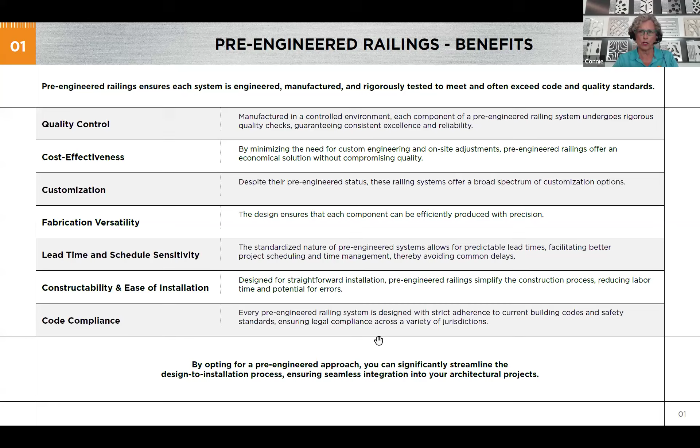And then code compliance. Of course, we're always trying to meet the safety standards and loads, with safety as the bottom line of what we're trying to incorporate with beautiful designs overall. So code requirements: there is a difference between a guardrail and a handrail. Handrail, think of it like if you lift your foot 2 times or more. So here's an example of a hand railing.

There can be some confusion. Sometimes it'll say 4 steps, 3 steps. If you're lifting your foot 2 times or more, a handrail would be required. Now, a guardrail, this is the top of the guard, a little bit different. That's meant to prevent a catastrophic event. So this is for a 30-inch drop or more where a guard would be required.

I just had a question last week about having a handrail in front of that guardrail all the way through, and that is not the case. Typically, you're going to have a cutoff at the top and the bottom of the stairs, which is on my next slide a little bit. Height of handrails are typically going to be at about 42 inches for commercial, required on both sides of the stair walking path. Opening limitations, 4-inch sphere rule.

We're all aware of that. Kids are cool. They do some crazy things. So think of a child's head passing through there, and do you go a little bit further? So I like this slide because it shows a cable rail. Today, the code does not speak to force or flex for cable rail. So with cable, you're always going to have a little bit of play involved. And we recommend 3.5, 3.25 inches, no matter who you're working with, because kids can surely do some wild things.

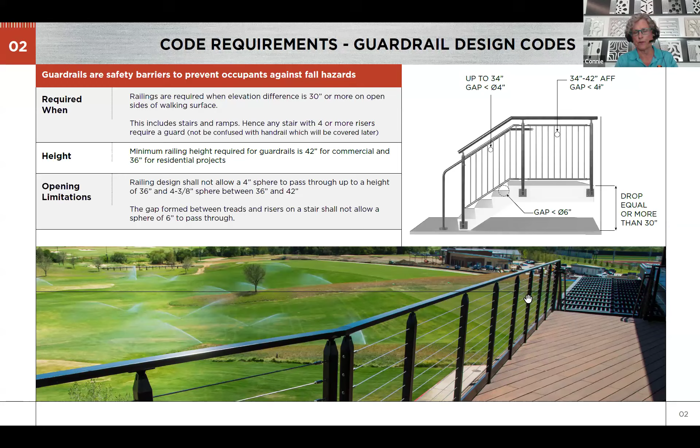Think of a work environment where tools may fall over the side on a mezzanine application. So having some sort of kick plate, doesn't have to be metal, but they indicate kick plate. So wood, just some sort of stop, so tools and safety is in mind. Prior to 2015, you had to have a handrail with a mid rail about in the middle were the words in the code. And then they changed it to OSHA rails need to be 19 inches from the top. So be mindful of that, depending upon your condition.

Handrails typically need to return to the wall, to the floor, or to itself. You'll see these 180-degree bends. 2015, again, huge code changes. So what had happened was you used to say 1 foot at the top, 1 foot at the bottom, plus a tread width. So there were these huge extensions out into the walking path of a sidewalk, for instance.

Codes are adopted by local jurisdictions. They are not written by local jurisdictions. They are adopted, and they can be more stringent or less stringent. So I will go into a little bit on how codes have evolved. Codes, back in the day, were all published in books. We had all sorts of different codes.

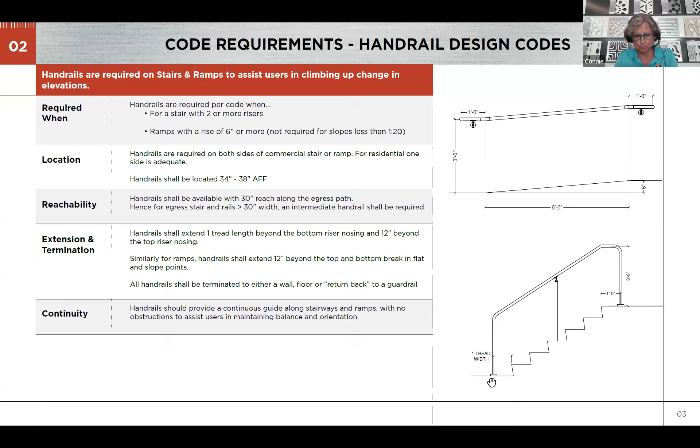So I mentioned briefly the ADA and ANSI standards, and I would talk about it now. So back in 1992, they picked up an ANSI standard which said 1.5" absolute for hand railings throughout the project. So imagine an airport with all these turns and conditions. So we reached out to the government and said, hey, you have picked up an incorrect dimension saying that hand railings for ADA have to be 1.5" absolute from the wall. That is a grab bar dimension. So think about those who are more frail.

You'll see it in restrooms where there's a grab bar, and it's meant for somebody to leverage their weight with their forearm and not have it slip in between the wall and the grab bar. So we started attending these code hearings because the government said, nope, we cannot change that. We're the government, and this is a federal law. So we started attending code hearings.

Code hearings are where anybody can suggest a code change. You get 2 minutes for your presentation, 2 minutes for the judge to answer, and then a 2-minute rebuttal. Very, very boring type of situation. But if you're passionate about a code change, anyone could submit it. It took 20 years for them to change that law, but they did it the right way. They said it's 1.5" minimum from the wall.

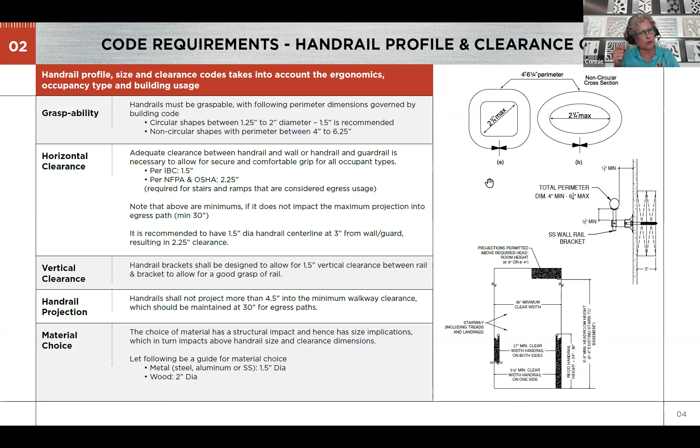And then with the material choice, typically, you're going to go with some sort of metal for your handrail, and it could be wood. So 1.5 inch standard, 1.5 inch OD for tubing sizes. But in wood, in order to meet that weight load requirement, it needs to be the 2-inch larger profile. And typically, posts are not made out of wood. There are many designs out there where you might see it looks like wood, but there's some sort of steel reinforcement in order to meet that weight load requirement.

2015, huge for hand railing changes. Prior to 2015, you had to have 3 lights of glass and a top cap. There's many benefits to still keeping that top cap in your design. And this would be an example of a top cap. With a glass railing, 2015, all glass needs to be laminated. Polyvinyl butyral for interior. SGP, SentryGlas Plus, a naming convention, which SentryGlas sold the royalties. Very rigid ionic interlayer for exterior on the SGP.

But once that wording went in 2015, that lamination actually took away the requirement for having that top cap, but we're always going to recommend it in the hand railing world. There's reasons to. If it's an exterior application, moisture can gather where the lamination is, and then you may see clouding at the bottom of the glass. The other reason is glass comes with flaws. Nickel sulfide inclusions. And if a ring or a watch or some sort of piece of metal would hit that glass panel at that top edge, you may see something burst. That said,

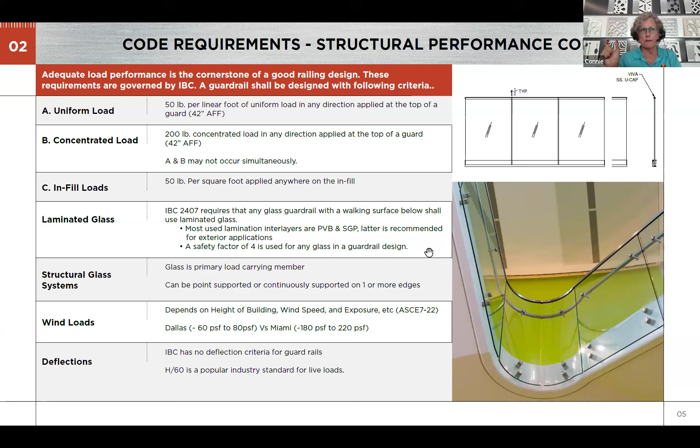And that would be the materials used for hand railing, PVB on an interior application. And then that ionic rigid interlayer, depending upon how thick you make your glass, it will meet the Miami-Dade wind load requirements, the ICC wind load certification requirements. So that SGP is amazing on how it can hold up over time.

Designing and specifying railings. So know that if you call a handrail, and maybe it's over in here more for traffic flow in an open condition, if you call it a handrail, you're going to have to meet that handrail requirement. I had a library at a K-3 school, and they had all the little kids when I walked in sitting on the floor. Not everybody was 3, or they were very short. There were 2-year-olds running around, and they were trying to corral them within this area. So this was something that they call traffic control, not as stringent, but you definitely want to make sure to keep people safe.

Thinking about maintenance and value over time. So that condition with the wind load requirements, that's something where, gee, if they would have went a little bit more in price, you would have had a better structural option on there. So understanding the full scope and maybe doing a design call with your railing supplier would be something to think about way, way early. And then how to call that out in the spec.

So if you notice on this particular photograph, the hardware is powder coated. So it really hides a lot. There's a slide later on that I love where you don't even see the posts. You see it's a flat bar right here. It really hides a lot when you powder coat all the hardware and posts involved. However, we're going to always recommend that this handrail remains stainless steel. Better value over time.

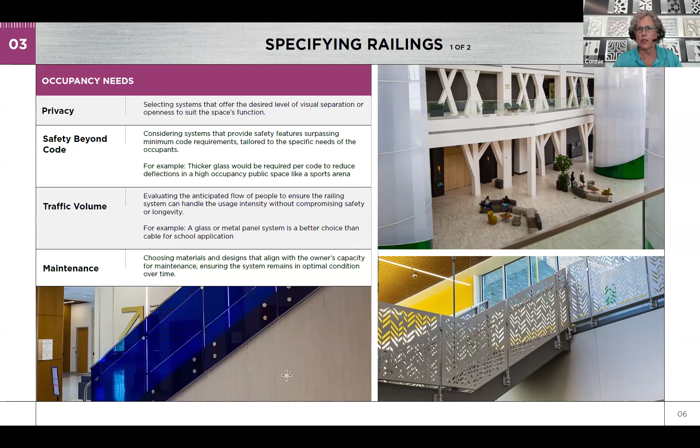And the reason would be high traffic areas. I became hyper aware during COVID. Powder coating gets sticky, it chips, rips, gets dirty. You have to touch it up and paint it and clean it. Where stainless steel is amazing because the natural oil of your hands running over it, it can hide scratches. It can change the finish on there and make it more durable over time. So with a little bit more investment up front for a stainless system, you're going to get better value, less maintenance, things like that. So again, that's immediate cost.

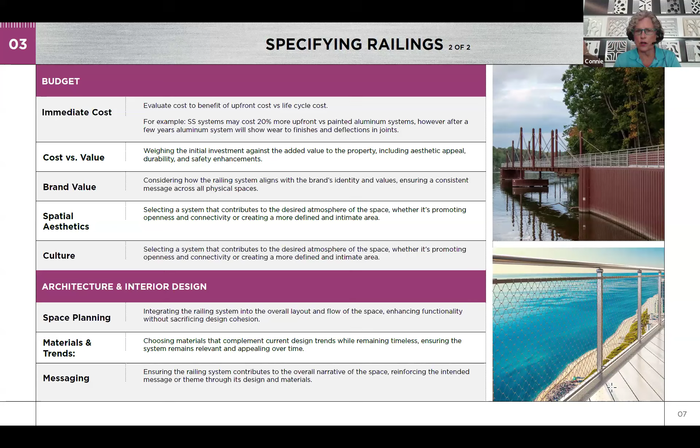We had a condition where the HVAC system was not strong enough to handle the chemicals in the building. So understanding how they all work together, stainless steel stains less. It is not rust proof. So I know that when there's an embedded type of post, sometimes you'll see rust there. If they would just curve that a little bit to make the water run off versus settling within that opening, how critical and important that is, would be great to prevent any sort of rust happening.

Specifying your railings. Are you thinking about, gee, I want the hardware powder coated? On the post side of it, I want the wood on top of it, and understanding what all that means. Here we have a little fancy two-tone effect going on, actually three tones, but what you can play around with for your design.

Understanding constructability. If we're attaching to an exterior surface, are you thinking about how that's going to drain? Would there be options for coordination, especially for a rooftop waterproofing? What can everyone do to talk way early, again, way early in the buyout process in order to coordinate that waterproofing so you're not going to jeopardize your warranty?

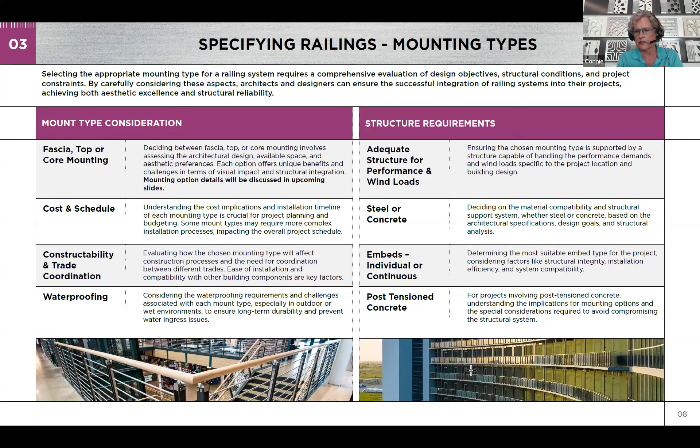Understanding your most structural mounting option. Is it going to be steel? Is it going to be concrete? I'll get into that a little bit further down when I have some mounting details up in front of us. Oh, there they are.

So typically we're going to be looking for about 4 to 5 inches of concrete, 4,000 PSI. And this could be specific to any railing system. You want to understand that. And if it is going to be mounted on an edge, we're going to look for some sort of steel. Steel is definitely structural and will hold up.

Here you notice it's a 3.5-inch minimum setback in that concrete because you have the weight of the aluminum shoe. That aluminum weighs 10 pounds per foot on that extrusion. You also have the weight of the glass, the weight of the cladding if you're going to cover it in some sort of stainless or whatever you're going to clad it in, the weight of the top cap. So that is a lot of weight to hit the edge of that concrete. It'll break, it'll fail.

Folks ask, what's a mounting surface you need for an aluminum glass system? Typically, we're looking for about 2.5, 3 inches. At 2.5 inches, you'd have a 1/4 inch on each side that may extend over. You may notice it, but people who aren't in the architectural handrailing world wouldn't really notice that. So again, that's a discussion you want to have. What can I do to save money and make things more cost effective and think about those mounting conditions?

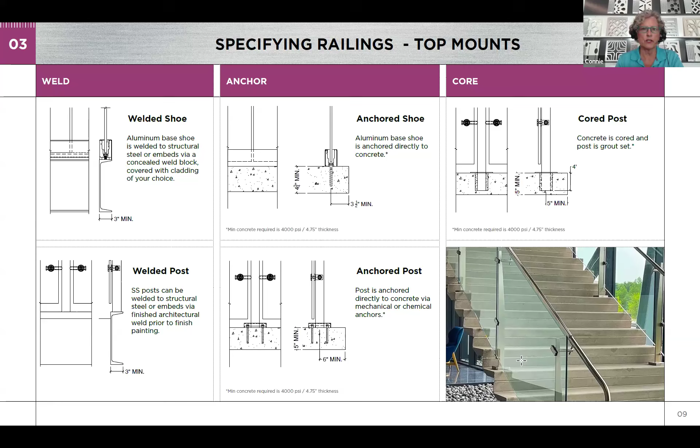So with a glass system, shoe is definitely the most popular. You can hide that mounting condition below the floor surface so it looks like the glass is coming out of the floor. But a post system may be less expensive, and another option for a VE condition. So VE is not something to be afraid of when you're working with a glass railing. Anchored shoe. So we're typically going to look for some sort of metal. That is going to be your most structural.

Fascia mount conditions apply. Sometimes when something's off and you don't have that inside to inside clearance of 30 inches, this is a fascia mount application where there's a sacrificial plate welded to this channel, and then a beautiful plate is mechanically attached. That sacrificial plate can vary in thickness, 1/2 inch, 1 inch, to make you meet the requirements of that handrail distance.

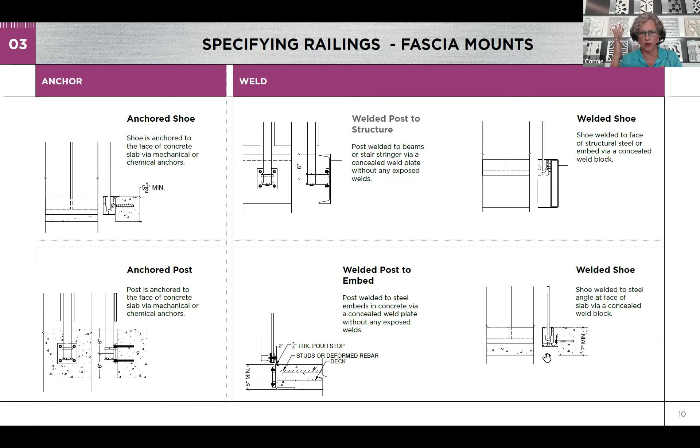So when I spoke of the penthouse with the railing going 3 inches in either direction, this was the culprit. Bigger is better. They had steel angle mounted on a curb. We would have gone bigger on the curb, and we would have gone bigger with the angle. It was 1/4 inch angle, which created a bounce effect. So go bigger on your angle, 3/8 inch, 1/2 inch, something to be mindful of for safety.

Plans and specs. Of course, copy and paste is your friend and your enemy. You want to make sure your words are clear, concise, black and white instructions. So if you go to specifying the Word document, take away as many words as possible. RFIs come through probably every day. Sometimes it seems like hand railings are catching up to the rest of the building. I see that frequently, but those early discussions of understanding what your design intent is and how we can meet that overall.

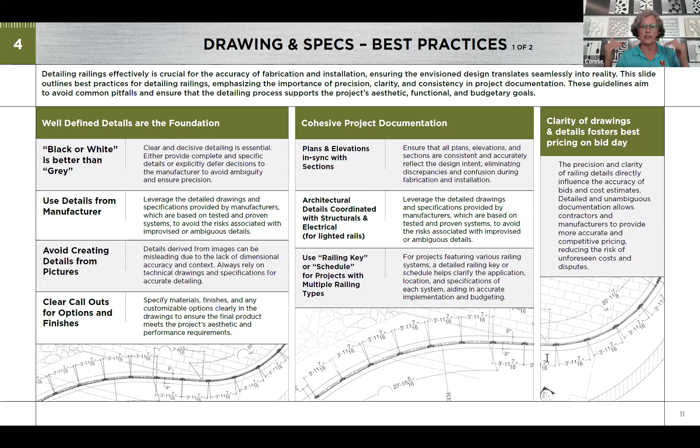Are there 2 or 3 railings in your spec? So have that mentioned for each one in the spec, and then create a railing key where people can understand, oh, it's a steel handicap rail on the ADA ramp, but stainless steel here, glass there, or cable there. That key helps guide everyone and takes away confusion and saves time.

Plans and specs, another slide. So understanding how important this is, you want to make sure to go back and look at your master template. Are there finishes that are outdated or finishes that you're not happy with? Or material you're not happy with?

I know Corten was going through a huge burst in the 80s, 90s, and it's pretty cool for planters. However, if it's a Corten material in screens or railings, you see rust on the concrete. Is it going to bleed over time? Because if a scratch gets on a Corten material, it will re-rust again, and you're going to have a little bit of a mess.

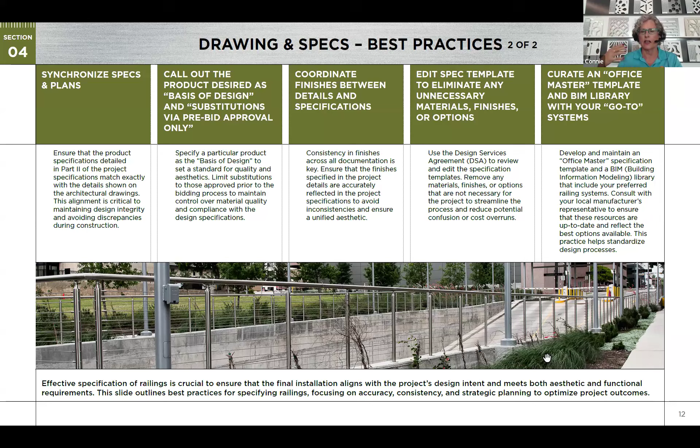So coordinating design assist services way early on. So we had a project where the architect had wanted the spacing on the post to be 10 feet apart. And we could do it. Could they afford it? No. So then we got permission to reach out to the architect and try to figure out, why do you want this 10-foot spacing? Typically, handrail posts are 4 foot to 4'6" apart.

And what we determined was the architect wanted to stand at a point in the street for their design intent and see all the posts line up perfectly. And we said, gee, could you live with 5-foot spacing versus 4-foot spacing or 10-foot spacing? Can we compromise? So we went to a standard system trying to figure out if the calcs would work out. And lo and behold, they did not. That particular system was at 4'6", I believe, but then compromise.

So on the grand staircase, 4 stories high, on a helix, double helix, what could be done? So in that one particular area, if we went with solid bar versus 1/2 inch hollow tubing compared to 5/8, would the calcs work out? Yes, they would. So we could go with 5-foot spacing in one area of the project, and the rest was standard off the shelf products. So some savings over here to get that grand staircase effect over there. So that early collaboration, avoiding risk and understanding we're always trying to meet that weight load and structural requirement.

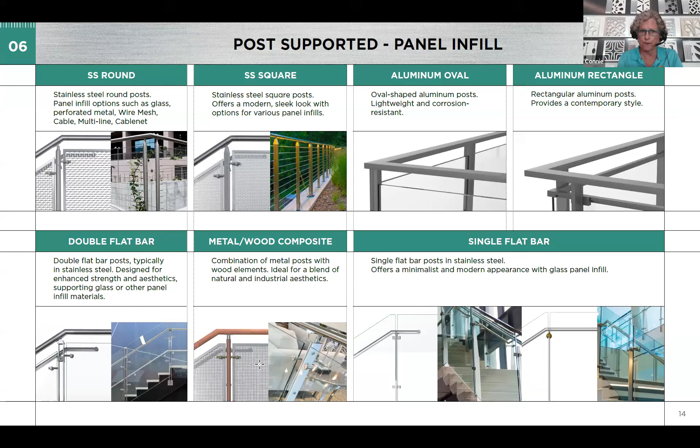Examples of cable and multi-line. So cable, again, has that flex involved versus a multi-line being very rigid. We want to be mindful of this.

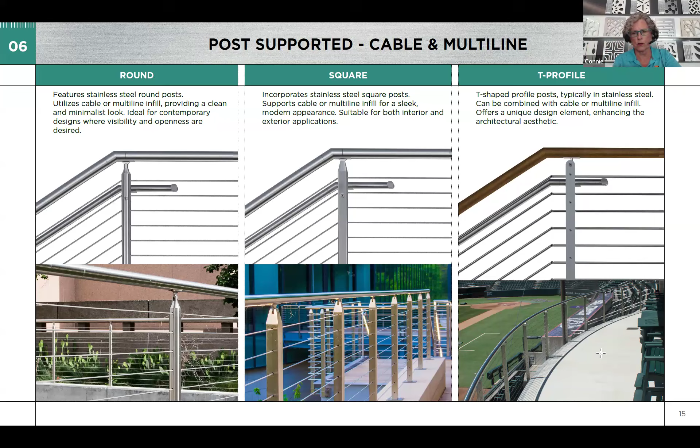So you can start out with curved glass, go into segmented. You could go down to a standoff or spider system for mounting conditions or a post system. Very structural spigot system involved. There are ways to get around VE and still have that sophisticated look of a glass system.

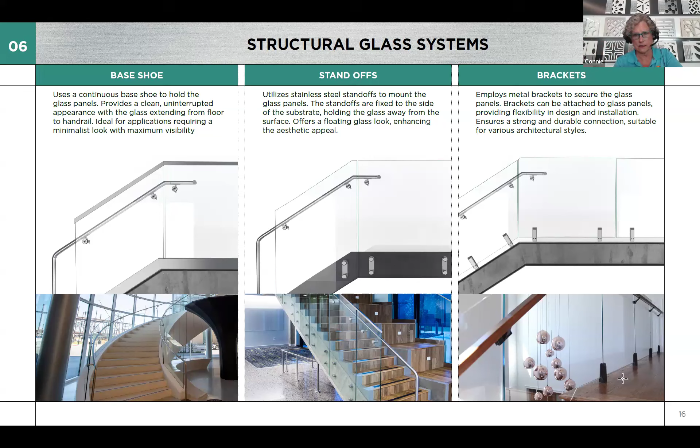Structural panels. So this is one that customization, I've seen all sorts of things. Know that no matter who you're working with, you always want to go to the website for the most recent changes to any handrail system. Continuous improvements should be happening.

So this particular system, we used to have like a T-type post and now it's a flat bar post. And I've seen architects take this post and extend it 8 inches into the center of the design or outside where they want it to look like a fin system. The rule of thumb is that post should be about 18 inches from the top.

Another good example of continuous improvement, we're looking for customer feedback. So here's an example of a folded panel that used to be folded at the bottom and the top. And then we received some feedback where kids were throwing trash and gum. It was difficult to clean in a school.

What could be done? So could we cut away that bottom portion of that fold and the trash just falls through? Less maintenance because it's faster to sweep something up. So continuous improvement happens for all of us all the time.

So on the structural panel system, you're going to notice there's actually a border, which is typically about 1 inch. And then when you're doing your shop drawing approval process, can you sleep at night with a half circle versus a whole circle? Could they scoot this over? That's up to y'all. We can do anything, just as long as that border is there to hold that structural integrity.

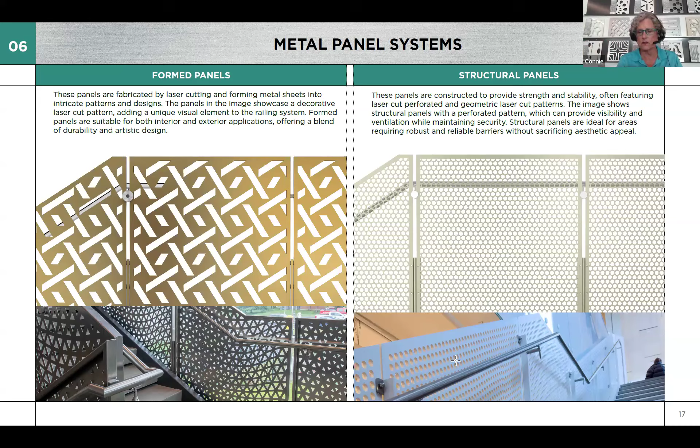With a structural system, the rule of thumb is you don't want that hole size to be smaller than the material. And typically the smallest you can go on a structural panel is going to be 1 inch. There's other options with a perforated system, which I'll show later.

Laminated glass. So here we see the difference between polyvinyl butyral, PVB, and SGP for exterior. Now I say PVB for interior, but if you're going to want it tinted, colored, maybe you want some sort of ceramic frit or decal baked on, that method of creating the tint or the decal may require it to go into an SGP application, that rigid sort of process to bake it on and not change the glass integrity.

Low iron glass versus clear glass. So low iron would be a museum grade tempered laminate. It's actually got almost a white, you can't tell, but it's a very museum grade low iron. You can see through the glass, where clear glass actually has a green tint to it. You can notice green on the edges of the glass.

You and I would know, most people don't know. So it's just a little bit less expensive going with that clear glass versus low iron, and understanding how that's going to affect your design or the room elements.

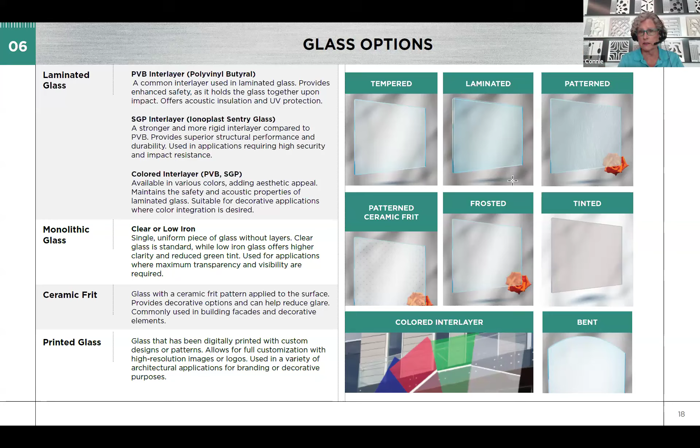Framed wire mesh. So wire mesh, not too much price difference within various designs. However, I did hear a story from an architect who had an inexpensive U channel. Again, stainless steel stains less. This was an exterior application, and water sat in that U channel versus an enclosed frame.

And the whole wire mesh had fallen through at about 5 years of water sitting in there. So maybe you incorporate weep holes in your design as well. So things to be thinking of.

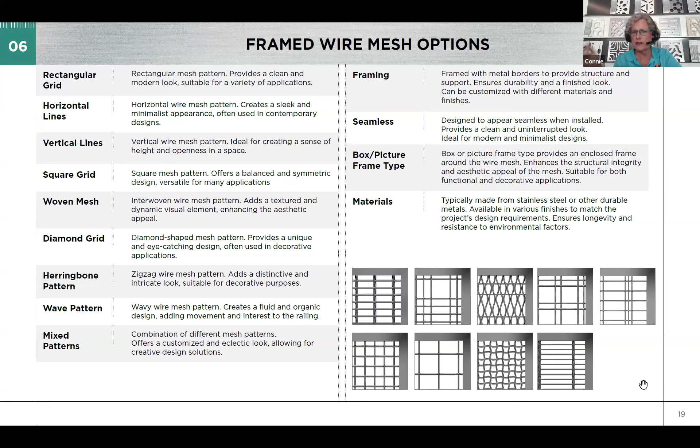Sometimes we see where architects want this pattern to go in a diamond fashion. That would be a little bit more expense versus horizontal and alignment. So various things to think about on what can be done in your design, and thinking about that way early.

Here's that example of a perforated metal. So many times I'll get a structural bendable application on a structural system, and they want these teeny tiny holes. This would not meet the weight load requirements. It has to be in some sort of enclosed frame to meet that 50 pounds, 200 pounds concentrated load in any direction.

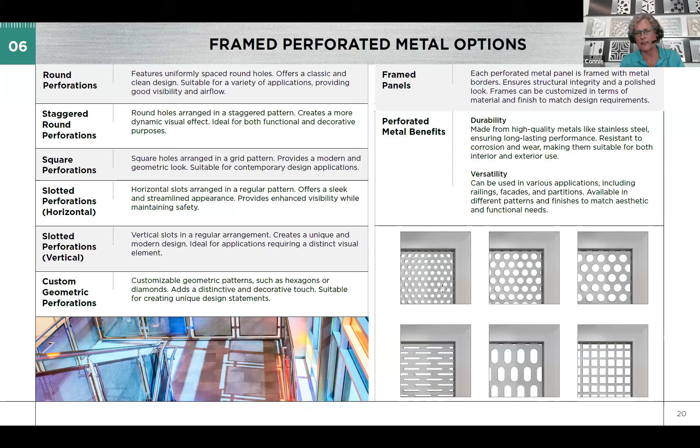Very common to see, gee, can I have this in a structural? No. Could this be bent? No. It could be segmented. You might have an additional expense for added posts involved at the stop and the start, but metal doesn't curve well, or bend the easy way, the hard way.

You're going to see crinkling, or the stretching may cause cracking. So you want the right system for the right curve. So there can be some limitations on that.

Powder coat finish options. Know that you want to typically start out, well, I've seen many things. So it could be a custom color. You want to allow extra time. We had an application where the architect wanted bronze champagne. Dropped off some samples, one color chip in champagne, too pink, one color chip in bronze, too brown.

And they said, no, we're matching this color that we already have. You will be required to tell your supplier, what is the color? What are we matching? Is it a PPG? Is it a Pantone color? They're very good at showing percentages right away. It could be a RAL color.

You have to tell us exactly what we're trying to match in the industry, and then allow time back and forth. Are you going to take it to the owner? Is there sunlight, computer screens? This particular application with the bronze champagne, it was a PPG color paint. The paint was $800 a gallon. Could we get it? Could we match it? Absolutely. Could they afford it? No. So that paint has to be baked down, and then it's a powder coat baked-on finish. Were they able to do it in the grand staircase? Yes. And then they compromised on the rest of the project. So I can't wait to see the sunlight hit that.

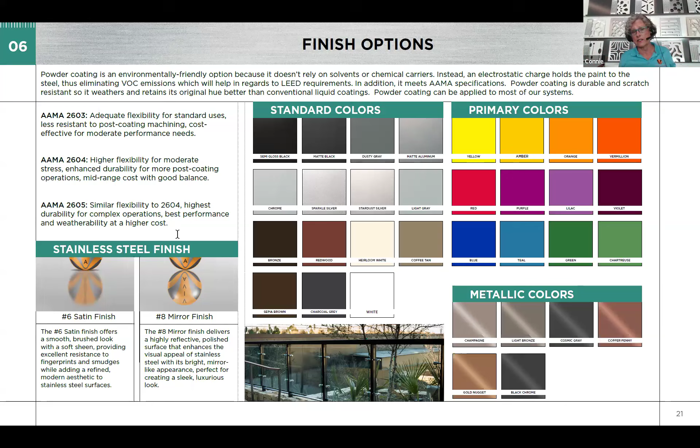2604, most common powder coat finish. If it's an interior application with lots of chemicals, maybe the diving board is 30 feet away from the railing. But is there going to be a line at the diving board where little kids are leaning on that railing and you've got chlorine and chemicals hitting it? You may be better off going with a 316 in your stainless steel versus a 304 application, and then the stronger finish of 2605 on there.

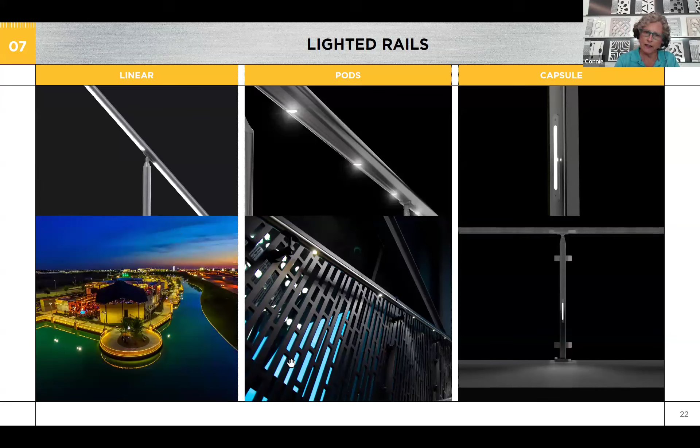Here's a picture I like of the structural handrail system where the posts are powder coated, you barely see them. And on the other side of it, it just looks like a wall. It's pretty beautiful. So LEDs have been around since about 2008. Know that ETL rating is typically for the whole handrail system. We want to make sure people aren't getting electrocuted. Interior applications, exterior applications, not submergible for LEDs typically. And you want to hold a line item open as well on this. So think of a daisy chain application where these wires are coming down through the posts. The code reads that a licensed electrician must hook up that electrical LED. Well, we can pre-wire everything and then the electrician is only going to wire it over to the junction box, which would be the line item to keep open.

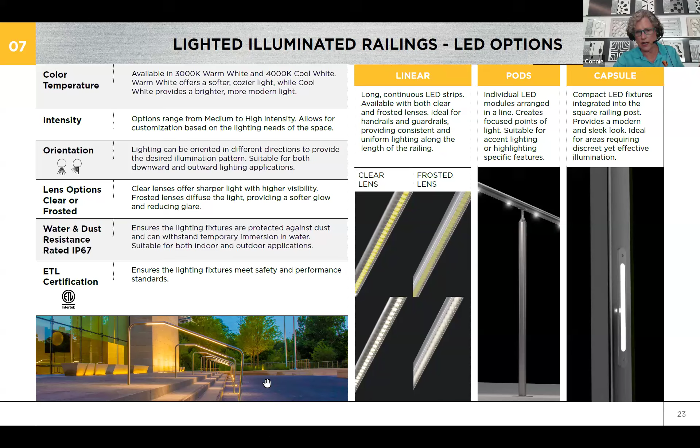Know the orientation of your light. Are you lighting the whole walking path, or do you want it asymmetrical, maybe where that light isn't bleeding over into people's eyes? This slide says typical 3K, 4K, but LEDs are awesome, and that technology goes so fast. It's now available, I believe, at 2700 up to like 6,000 or 7,000 Kelvin color with a dial now. So they are really making strides. Your lens is something to consider for your lumens and measurement. Is it an opaque frosted? Do you want a clear lens? So many things to consider. And again, early buyout. How are they going to get the wires over to the junction box? Is there conduit that's required within that concrete? Where is it located? Early discussions. So the advantages of that turnkey system,

I have about 8 minutes left. I am going to stop sharing and reshare within our website. We have so many options out there. And let's share this. Take me just a moment. Let me know if you need any help, Connie, but I'll let you know when I see your screen. Got it?

Yep, we're good. Okay. So VIVA Railings, we've been in business 20 years, always continuous improvement, just like any good long-lasting manufacturer. Typically, on our website, you just want to click on products, and it's going to navigate down to various options that we have. Hand railings in metal, glass. We've had the equipment around for metal screens, which we call metal spaces. That's been in place for several years, a brand within VIVA. So what can we do there? All sorts of options for canopies.

Here's Fogo de Chao with metal screens. And then each one of them should have some sort of mounting condition detail for you guys to see. So we start out, they give a little splashy picture, and you want to hit resources. Screens are typically available in 1/8 inch, 3/16 inch, or 1/4 inch material. And within that, it can be in aluminum, steel, or stainless product.

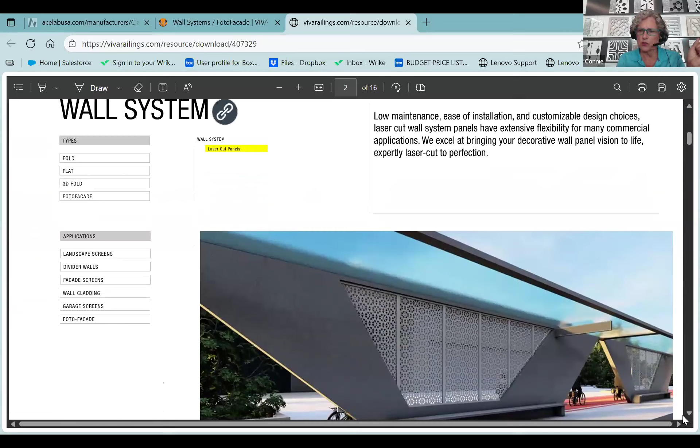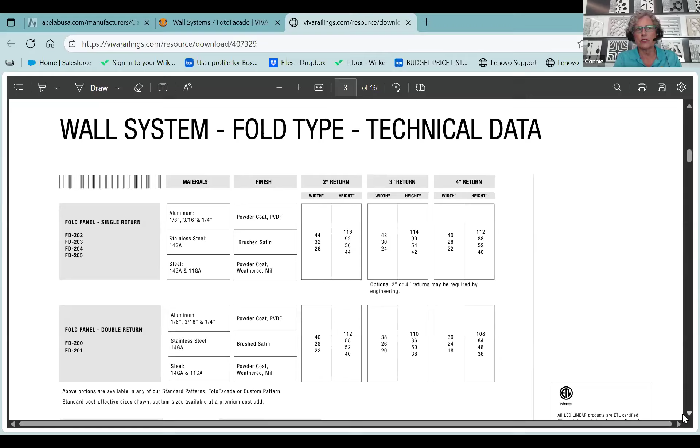These are some of my earliest design calls where they want to incorporate some sort of metal screen, especially for a rooftop condition or a window box, we call it, one that wraps around the window. How can we keep the integrity of the waterproof warranty? So I have a team behind me where we can coordinate early design calls and talk about that way early, because I had a really great firm reach out and say that they wanted this to stay in this school, but they found that it got VE'd out because of the coordination within there.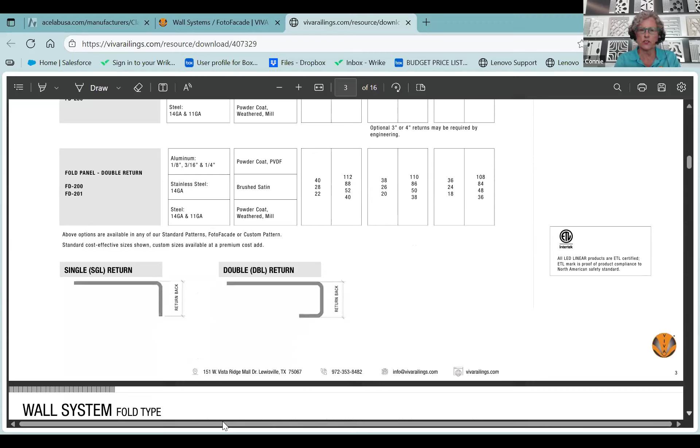So every single wall system or handrail has parameters, a nice little table. What's it available in? What are the typicals? It'll show various ways to return for mounting conditions, and then we get into what are the typical mounting conditions. So we'll see a few types of examples here, pretty straightforward. But then maybe you have a 4-story building and wind loads need to be discussed.

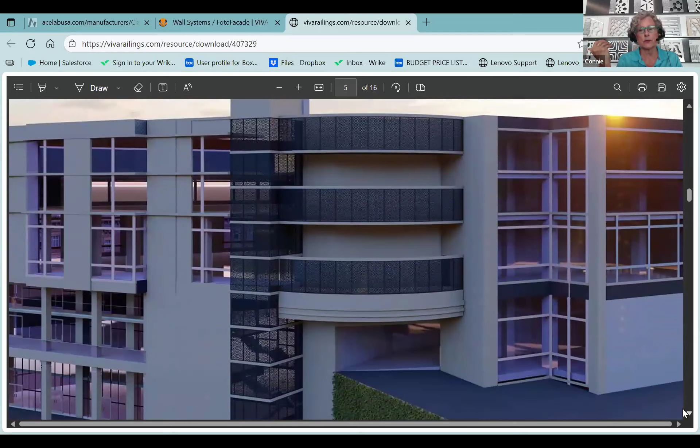And with VIVA, we have design, engineering, fabrication, and we can own it all the way through to installation on commercial projects. So wind loads are typically required in order to understand what we're going to meet. And if there's any question, we have the ability to run it past our engineers and try to answer those questions early, record it into the project level so that when we talked about it 9 months ago, what did we say? How are we going to do it? And I know that many times those projects change.

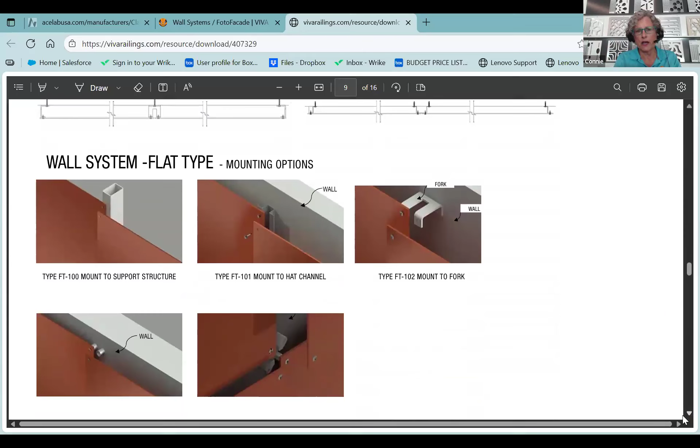The other thing I want to point out on our website is this little magnifying glass. It's very robust on our system, so I could type in Houston and it'll bring up various projects in Houston. I could type in the color orange.

Looks like my computer is thinking today. Let's go back a little bit. And up in here, I can type in Houston. Maybe I've got to be at the products. I'm sorry, a little out of practice. Products, Houston. Houston, we have a problem. No pun intended. Oh, Putin. Nope. So it doesn't account for typing.